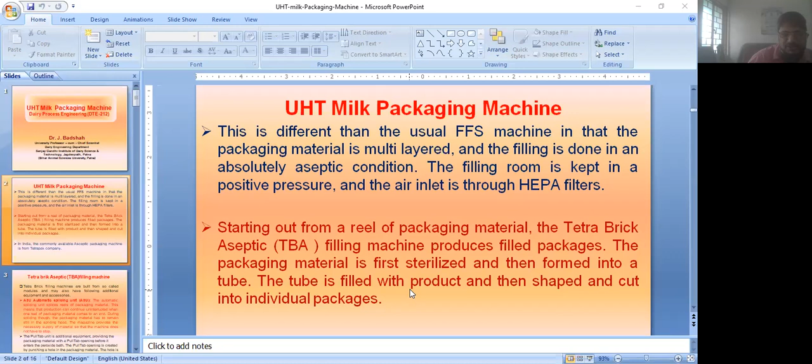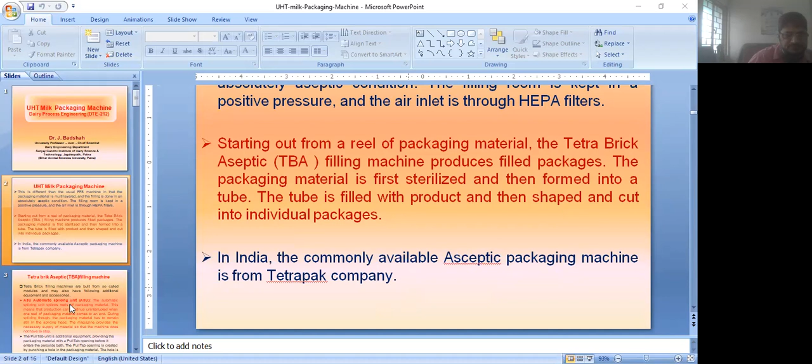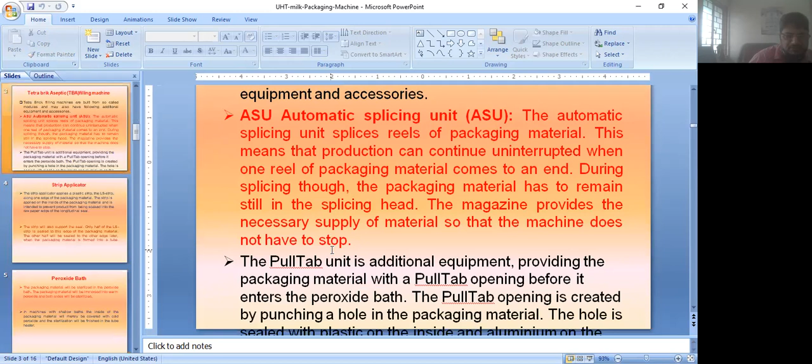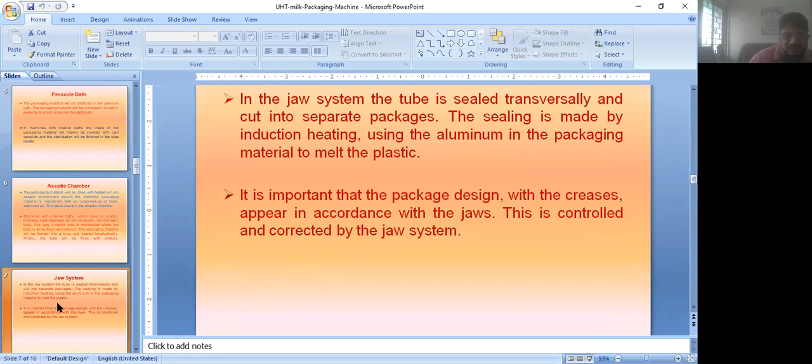Tetra Pak Company, Pune. Here you can see that Tetra Brik filling machines are built from so-called modules and also have the following additional equipment and accessories like ASU, automatic splicing unit, then pull tab unit, then strip applicator, peroxide bath, jaw system, final folding, operator panel. This is the system of the machine, and this is also one system, Tetra Pak TBA19 aseptic filling machine.

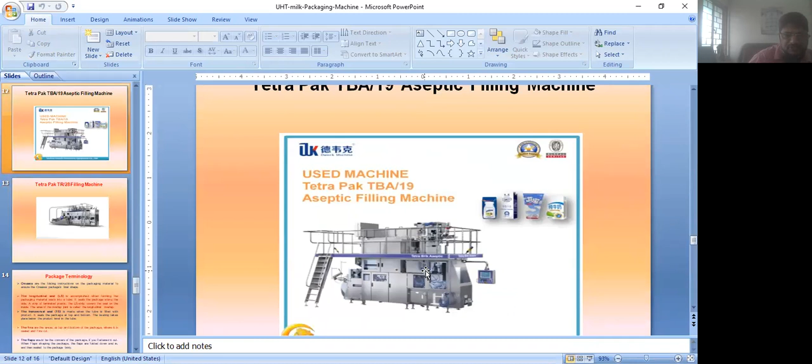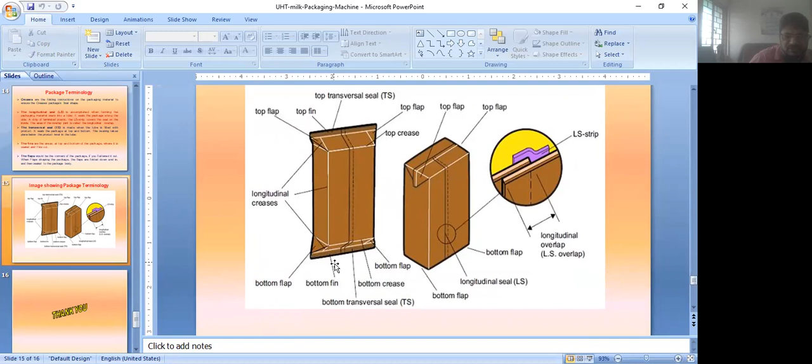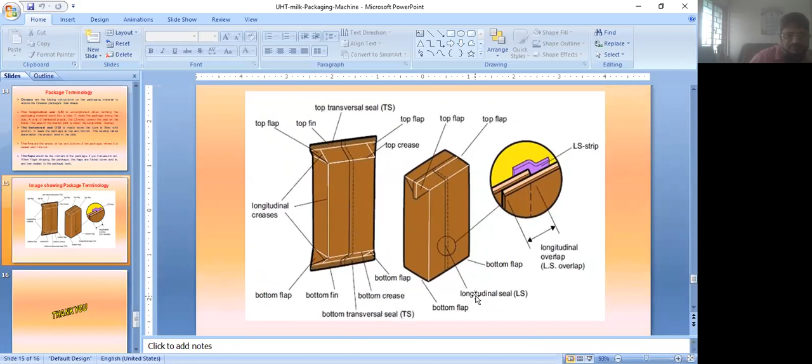And this is the packet which is made: top transversal seal, and this is the bottom flap, these are longitudinal creases, and here is the bottom flap, bottom creases, bottom fin. So these are the different figures showing packaging terminology. Creases are the folding instructions on the packaging material to ensure the package's final shape.

Longitudinal seal is accomplished when forming the packaging tube. Packaging material seals into a tube. The longitudinal seal is made by electrode, electric current. It seals the package along the side. A strip of laminated plastic, the LS strip, covers the seal on the inside. The area of the overlap joint is called the longitudinal overlap.

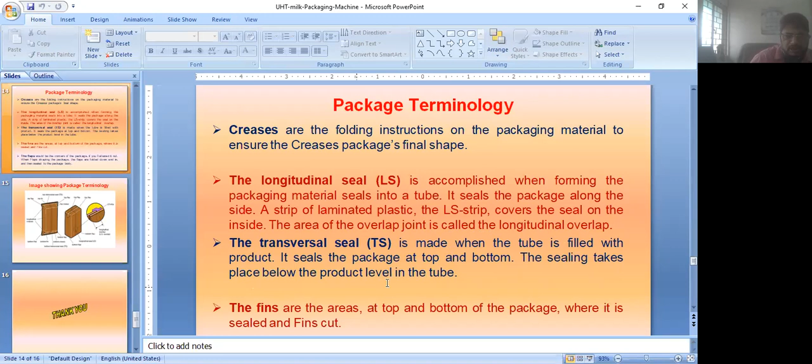The transversal seal is made when the tube is filled with the product. It seals the package at the top for the old package, and at the bottom for the new package at a time. The sealing takes place below the product level in the tube. The fins are the areas at the top and bottom of the package where it is sealed and cut.

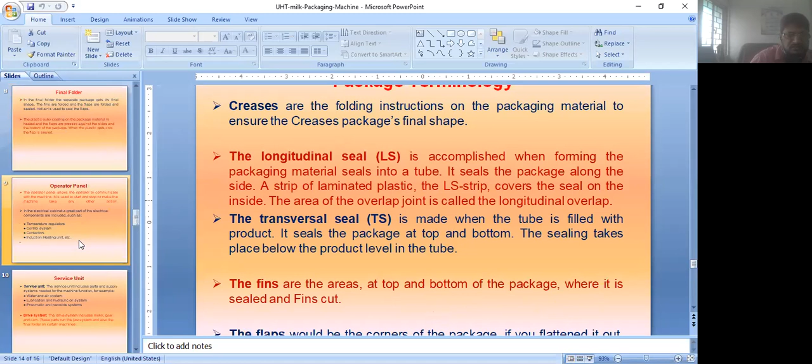Now let us see the packaging terminology part by part. So the first part is the automatic splicing unit, which splices reels of packaging material. This means that production can continue uninterrupted when one reel of packaging material comes to an end, though during splicing the packaging material has to remain still in the splicing head.

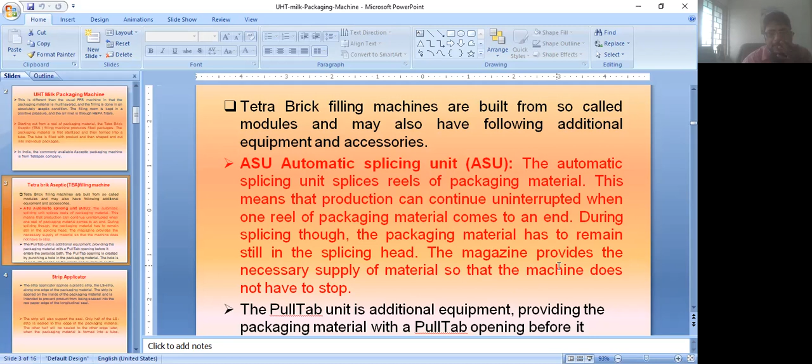And the magazine provides the necessary supply of material so that the machine does not have to stop.

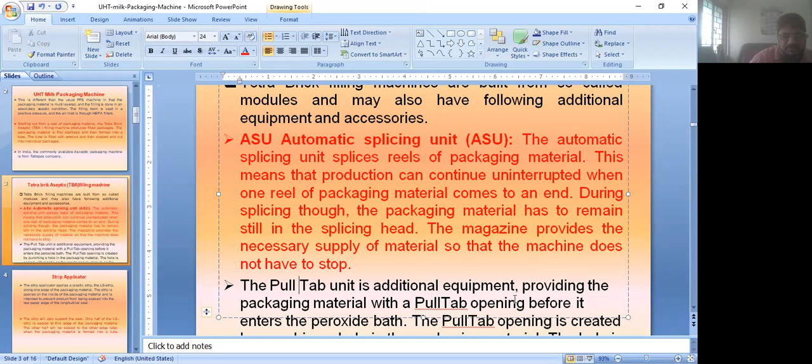The pull tab unit is additional equipment providing the packaging material with a pull tab opening before it enters the peroxide bath. What does this pull tab unit do? The pull tab opening is created by punching a hole in the packaging material. The hole is sealed with plastic on the inside and aluminum on the outside.

After that, it will go into the hydrogen peroxide bath, where the temperature of the hydrogen peroxide is about 30 degrees centigrade, atmospheric temperature, and the concentration is about 30 to 35%. Some aseptic filling systems use a bath of hot peroxide to sterilize the container or container material.

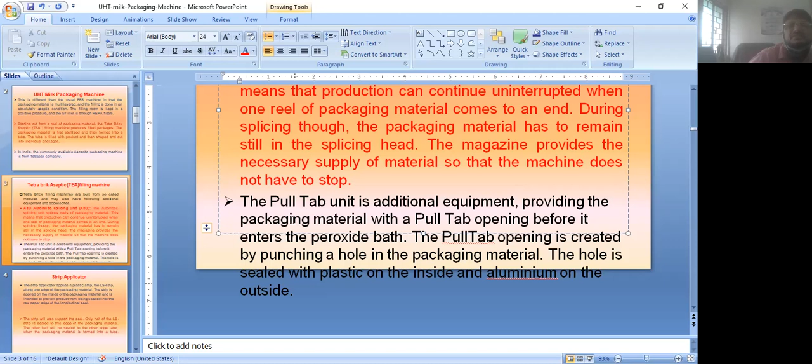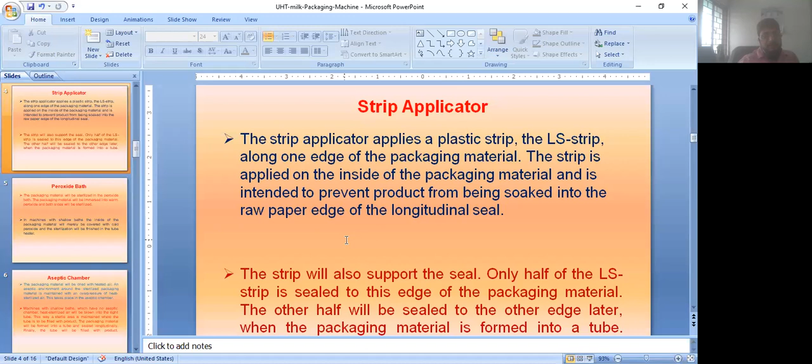This strip applicator applies a plastic strip, LS strip, along one edge of the packaging material. This strip is applied on the inside of the packaging material. क्यों? क्योंकि उसको strength देना है, and is intended to prevent products from being soaked into the raw paper edge of the longitudinal seal. So the LS strip should be given, which will avoid the product being soaked into the paper edge. This strip also supports the seal.

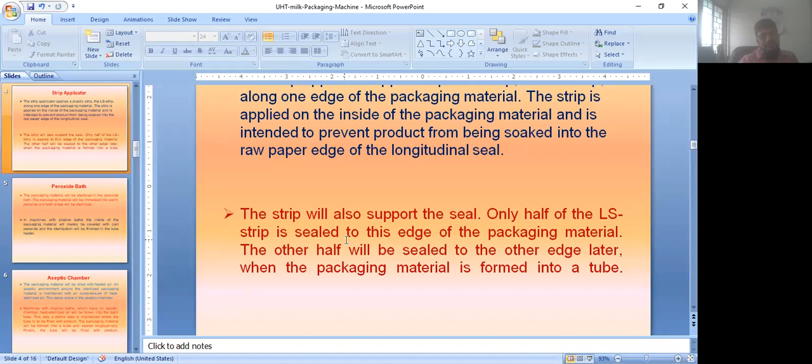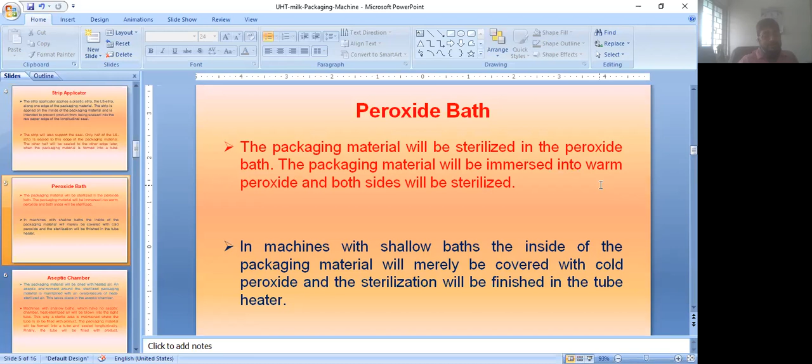One half of the LS strip is sealed to this edge of the packaging material. The other half will be sealed to the other edge when the packaging material forms into a tube. The packaging material will be sterilized in the peroxide bath before filling. In the peroxide bath, the packaging material will be immersed into warm peroxide and both sides will be sterilized. Both sides, अंदर बाहर दोनों sterilize करना.

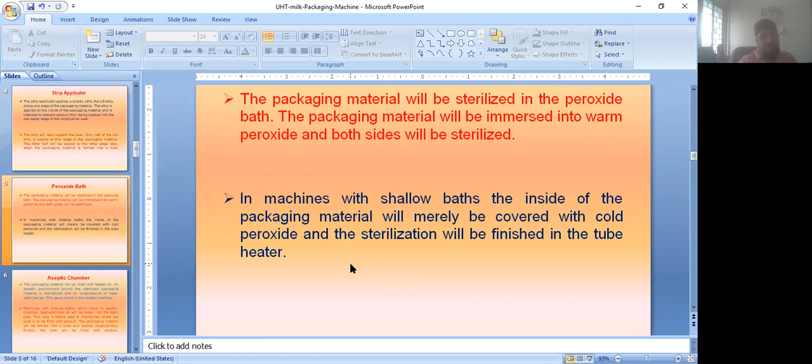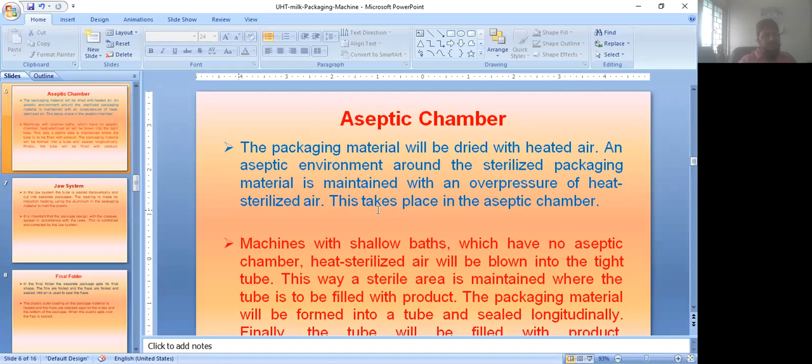In machines with shallow baths, the inside of the packaging material will merely be covered with cold peroxide, and the sterilization will be finished in the tube heater. The packaging material will be dried in the aseptic chamber with the heating air, जो गीला हो गया उसको ठंडा करेगा. An aseptic environment around the sterilized packaging material is maintained with an overpressure of heat sterilized air. This takes place in the aseptic chamber.

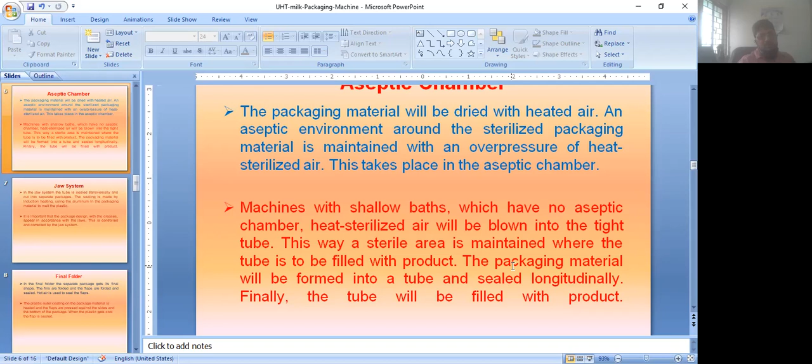In machines with shallow baths which have no aseptic chamber, heat sterilized air will be blown into the tube itself for drying of the tube. This way a sterile area is maintained where the tube is to be filled with the product. The packaging material will be formed into a tube and sealed longitudinally. Finally, the tube will be filled with the product while the horizontal sealing will complete.

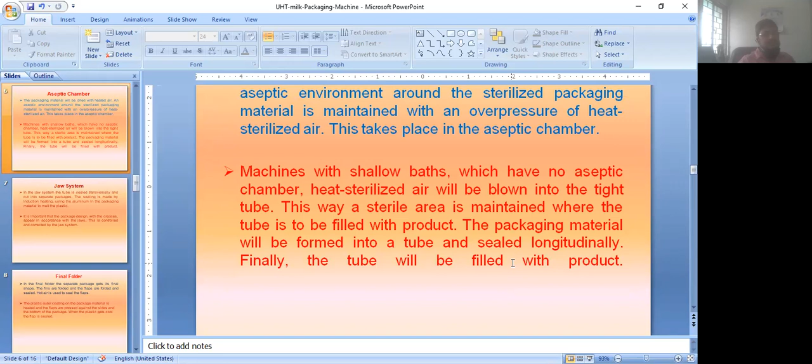Jaw system. In the jaw system, the tube is sealed transversely and cut into separate packages while the filling is also completed. The sealing is made by induction heating using the aluminum in the packaging material to melt the plastic.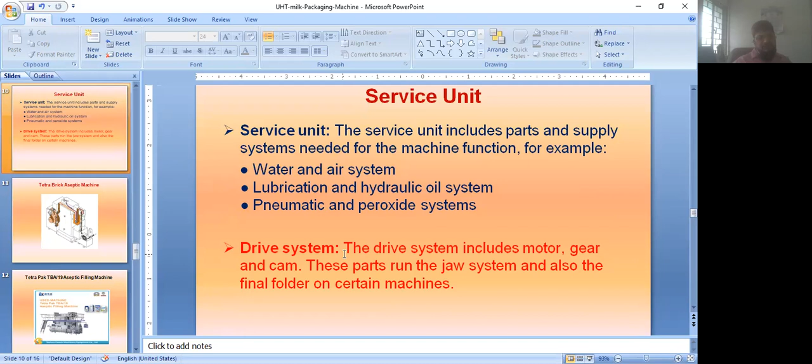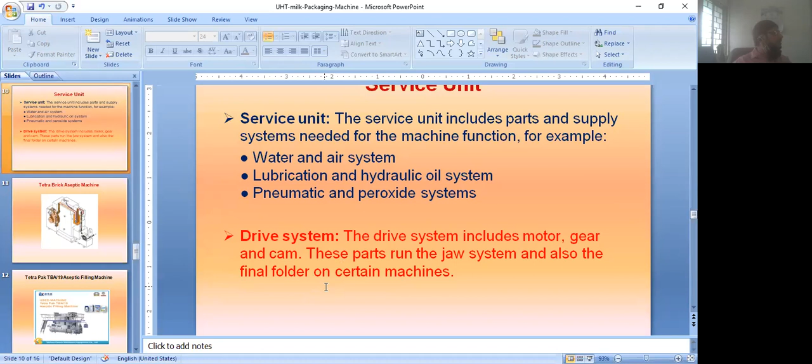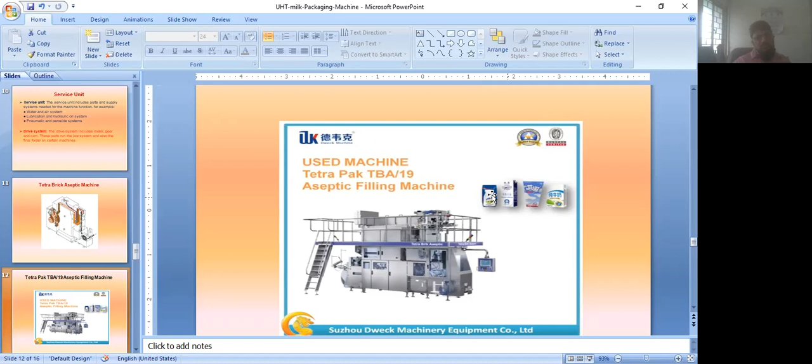Drive system. The drive system includes motor, gear, and cam. These parts run the jaw system and also the machines. I will show you when we go to this. These are the different packages of Tetra Pak. I will show how to manage it.